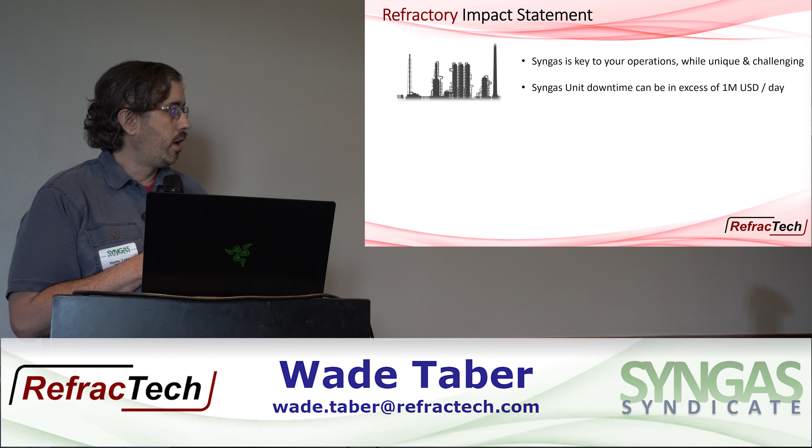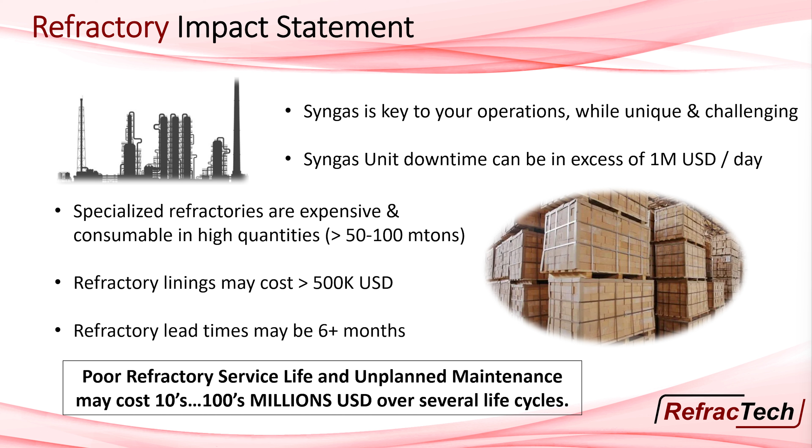But the main issue, already touched on, is the lead times can be quite high. We're talking about very specialized, not commoditized shapes, designed to work in these reactors. So to Fred's point, you've got to have a plan. We're not going to solve an issue just showing up and saying, what's your problem, I can fix it today. Ultimately, even when we get the materials on site, the refractory installation of the unit could be a month, could be 2 months. So that downtime, that unreliability that could be a part of the refractory, makes it one of your highest OpEx, CapEx loss contributors if you don't have this handled right. Over several refractory service lives of linings, you could lose hundreds of millions of dollars of production, if that represents 3, 4, or 5 months of operation over the course of a 10-year period. And certainly some in this room have probably realized some of those numbers.

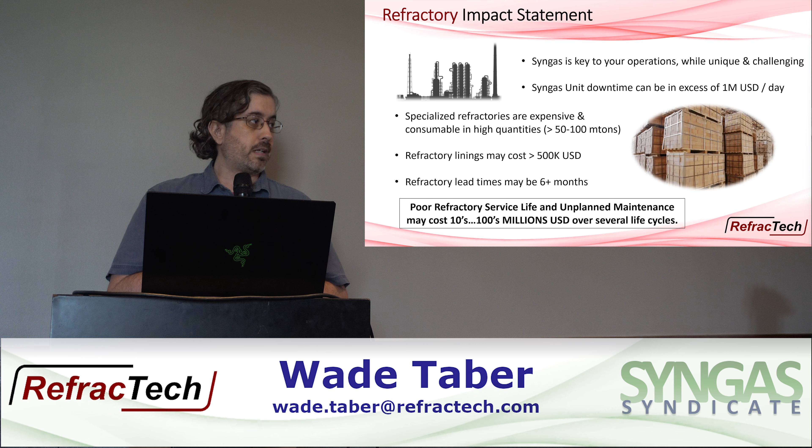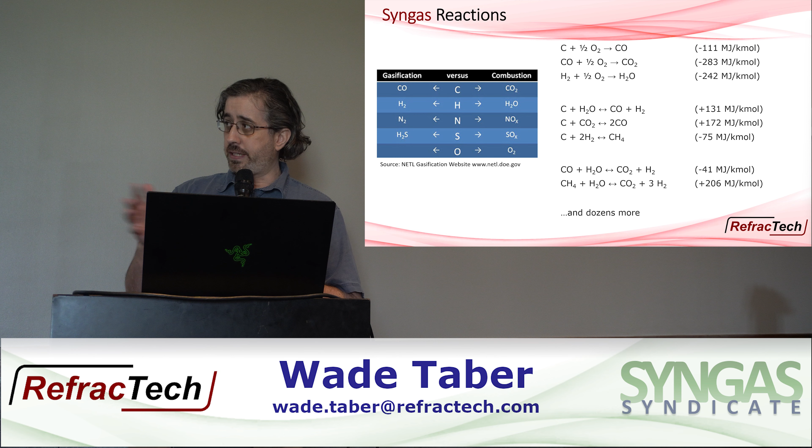But let's talk about what makes this process special. I'm not going to delve into all the reactions, but I want you to realize it's complicated. There's not one or two things going on inside the POX reactor. I'll say POX, but it could be an autothermal reactor or a steam methane reformer. A lot of these reactions are in common, depending on pressures, hydrogen to CO ratios, all these different things. You might pick a different technology, but generally in this room we're all coming from the gasification POX environment. Recognize that the top couple of reactions are your combustion reactions. We put in a stoichiometrically limited amount of oxygen to give you the exothermic heat that drives all the other reforming and shift reactions that produce syngas.

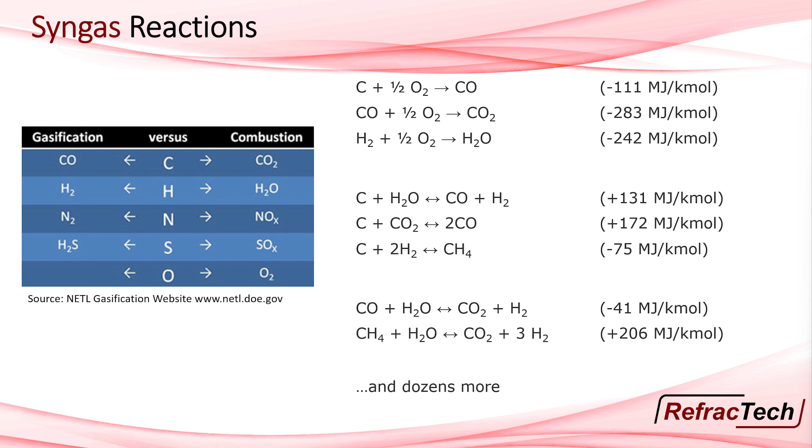What becomes important is realizing these reactions don't just vary linearly down the unit. They're in constant flux. These are all, or most of these are, equilibria reactions. So at different temperatures, different zones where the energy and molecules are present, these reactions are constantly shifting back and forth between CO and CO2, hydrogen and water, steam and methane, and the like. So again, it's not linear, and that's not a good way to think about it. Ultimately, you can think of it as having this oxidation zone coming out of the burner, but that oxygen is consumed - there's no other oxygen coming out with the syngas. And all these other reactions kind of shroud this oxidation zone, depending on how much energy they're getting from the oxidants and whether those various equilibrium reactants are available to produce the products.

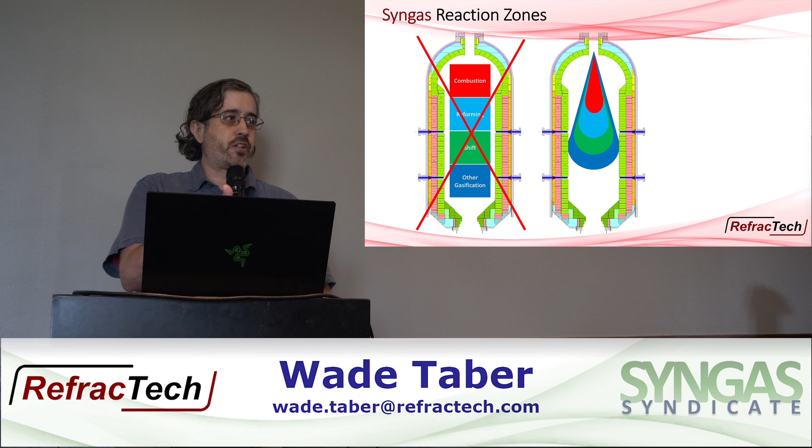What becomes important here is you need to make sure you have a good handle on process volume and flows, because it's very possible that if your flows get out of whack or don't coincide with your process volume very well, you can start to squeeze out physically the space where reactions can occur.

So where your process thermocouples in the middle section of the unit might be measuring 2400 and 2500 degrees Fahrenheit, your oxidation reaction is well above 3000 degrees Fahrenheit, well above the potential to melt every brick you have inside the unit. So if you extend the oxidation too far down into the vessel, like in the cone and throat areas drawn in this quench unit...

That I've seen many times, process thermocouples look normal, but the throat's been melted because there's no room for these other shrouding reactions that take the temperature away to occur. You're oxidizing on the cone, you're oxidizing on the throat, and you start to melt materials.

So there's a lot going on here, and there's a lot more variability inside the space than what one might imagine. And I think that's an important concept to understand.

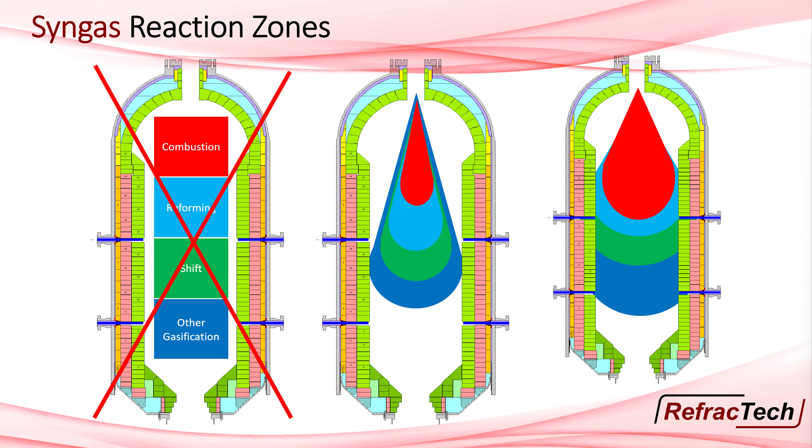When we talk about the various reactions that can be deleterious to the process based on syngas and based on these different thermal differences throughout the elevation and throughout the unit, one thing we have to realize is we can't make the unit too cold. Nozzles, flanges, feed injector nozzles, thermocouple nozzles, anything that gets too cold where the inner vessel wall drops below the dew point temperature of the syngas...

You're going to, just like condensation on your soda can, you're going to produce a liquid film. But that liquid film in the syngas environment, depending on the species that are available to it, could become hydrochloric acid, carbonic acid, ammonium chloride, many other different things that can cause pretty deleterious metal loss to the vessel.

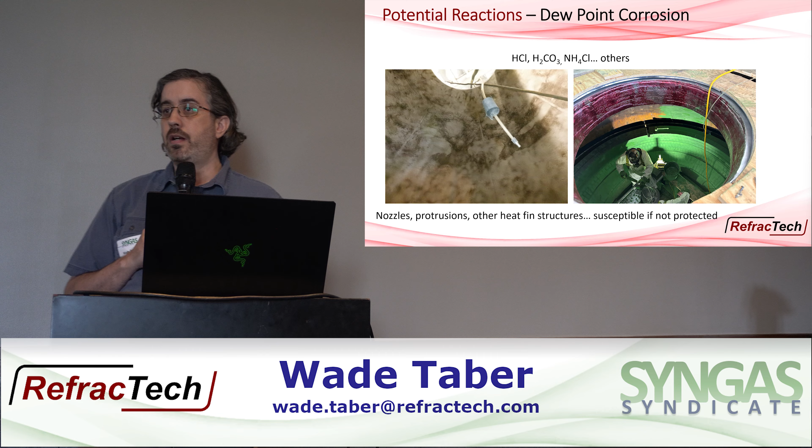So in fact, this is a picture just of this last year at a solids gasifier where their top dome got way too cold. The refractory installer switched out the type of castable that was above the dome.

They said, well, we're going to put in bubble alumina, and it made the dome way, way too cold. And in fact, they lost over an inch of metal up on their top head and had to completely go back in and re-weld and machine back. This process was about 3 months of downtime for them to retrograde the top head of their vessel.

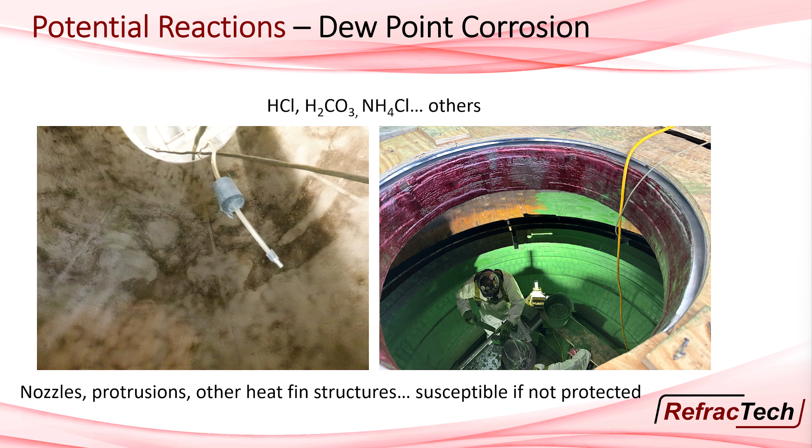So it's an issue that you have to be wary of. You can't be too cold.

Kevin mentioned this. The reason why we use high alumina refractories is because hydrogen, dry hydrogen specifically, is very capable of reducing silica, which is a very common material, not necessarily impurity. The high aluminas, it could be an impurity, but it's a very common material inside refractory materials. So your insulating bricks, your super duty bricks that are used in the outer segments of the lining, those tend to be safe because they're at lower temperature and below the reaction zone.

What we would do to evaluate is we'd pull up like an Ellingham diagram, and you look at the temperature that you care about that refractory sits in, and you look at the particular oxide that you're concerned about hydrogen reducing, and then you have to look at the partial pressure of the hydrogen. And that's what dictates whether or not the hydrogen will reduce that compound.

Incidentally, the way the Ellingham diagram works is you're looking at a ratio between the partial pressure of hydrogen versus the partial pressure of water. Again, dry hydrogen reduces much more effectively.

So what we end up setting ourselves up with is something like a solids unit that has slurry and a lot of water going in with the feedstock tends to have a higher partial pressure of water than some of the natural gas POX units. So they actually don't have to worry so much about the hydrogen reduction, but they have to worry more about the dew point corrosion because their partial pressure of water drives the dew point temperature that I previously talked about.

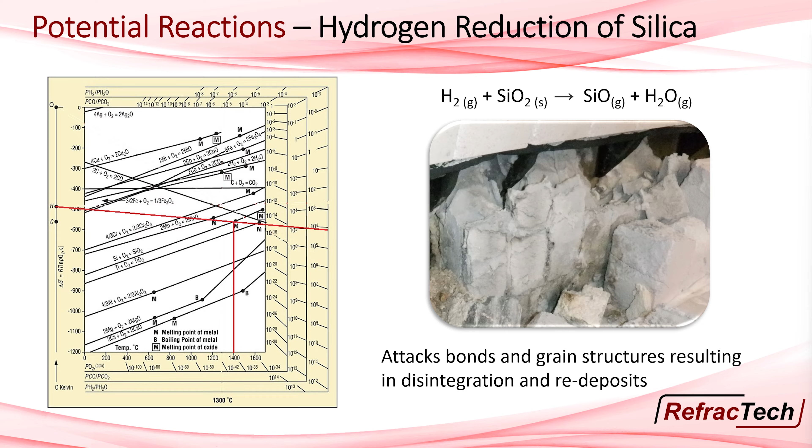So this is the intermediate layer of a unit, and these bricks just fall apart. Looks like little mountains of snow, right? The bricks just crumble when you touch them. And as Kevin pointed out, this material, the silica that was carried off, it goes somewhere, right?

It becomes gaseous silicon oxide. When this cools in your waste heat boiler, it flakes out and starts to form deposits and solids, and it starts to clog up your tubes. It becomes a big issue. It's not only deleterious in the refractory, but it clogs up your downstream components.

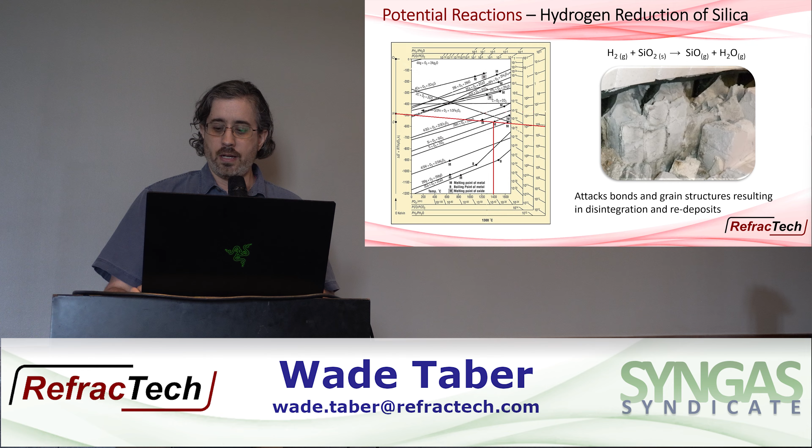Tim mentioned the Boudouard reaction. Boudouard is the decomposition or equilibrium of CO and CO2 that occurs inside the POX unit. It was actually on one of my first slides where I showed you all the POX reactions. You actually count on this in reverse to reform the CO2 into CO. The problem is when your CO partial pressure becomes high enough in a temperature band of about 500 to 1,000 degrees C, catalyzed by iron impurities in the refractory, we can actually start to convert the CO back to CO2. And because most of your POX units still have anywhere from 5 to 10% CO2, when the CO2 is formed, it forms with it another molecule of carbon.

This 500 to 1,000 degree temperature band I'm talking about is not on the hot face, it's not in the process volume, it's in the backup lining of your refractory. And so this carbon deposits in the porosity of the refractory.

Materials that have high iron contamination, which castables tend to have more of, just get completely torn apart. So here's a couple of pictures of the castable layers inside the refractory, right? There's a hot face here that's completely untouched, but inside the depth of the refractory, here's a castable body that's just completely carbon-filled. That was snow white dense refractory before it was put in. After a couple of years, I can dig it out with my hand quite easily. This is the Boudouard carbon swelling. The carbon is known to swell that refractory about 20%, and since the ceramic is inflexible, when you swell it 20%, it falls apart.

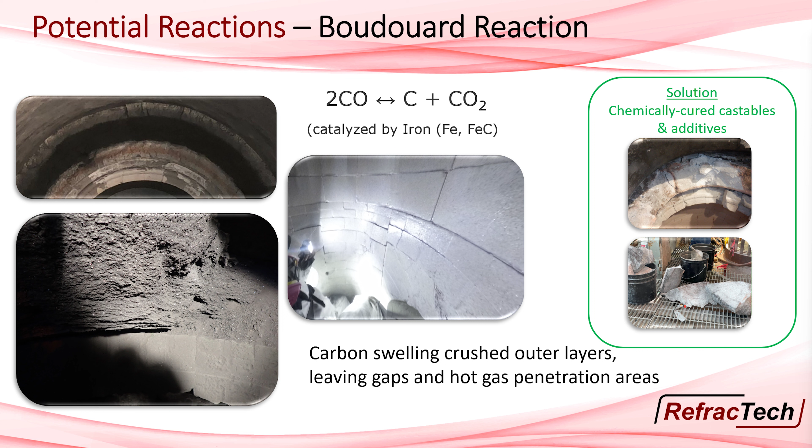So in many of your units, as we've worked on retrofits, we've moved to chemically cured castables. I'm happy to say - maybe it's premature - but I'm working with Saint-Gobain now on chemically cured castables, because they offer the capability of using some of their bubble alumina and other mixes to move to a chemically cured species, so we don't have to sacrifice things like thermal conductivity to get this benefit of getting rid of the Boudouard carbon.

So understand, if it's not clear - many of you know, in a POX unit with natural gas, you're not wearing away brick, right? We're not thinning out the brick over time. That's not the end of the service life for you guys. What it is, is the up and down thermal cycles where the joints become misaligned, and we'll talk about that. But it's also the formation of this Boudouard that crushes up the outer materials and forms gaps. And when you start to have too many hot spots because you got too much carbon in that unit, or too many aligned gaps, that's your end of service life. So these are the things we have to address in most of the units represented in this room.

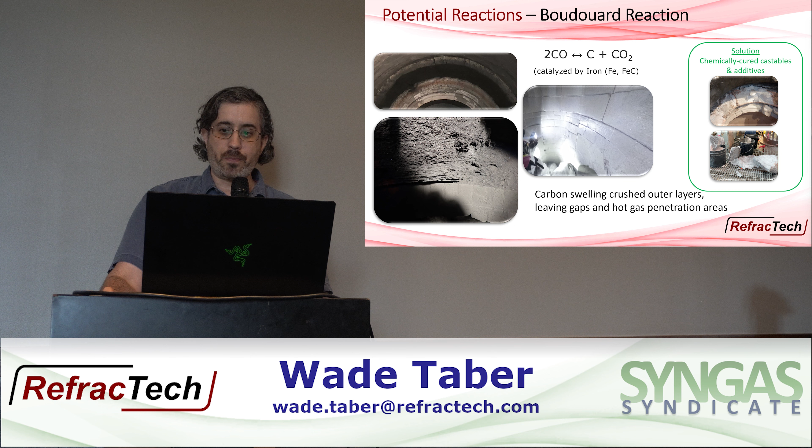So I kind of indicated - the heat transfer calculations are important, right? We can't be too cold, we get dew point. We can't be too hot, we damage the refractory. And all the differences in between.

So we have to understand that with the designs of these units, the things mentioned before - the hydrogen content, the molar volume percentage, the partial pressure - it influences the thermal conductivity. In some cases it can double the thermal conductivity of a highly porous material. We have to understand that. We have to be analyzing the heat transfer of these reactors with the fiber properly compressed in its use state, not in its installation state. That could throw us off by 100 degrees or more.

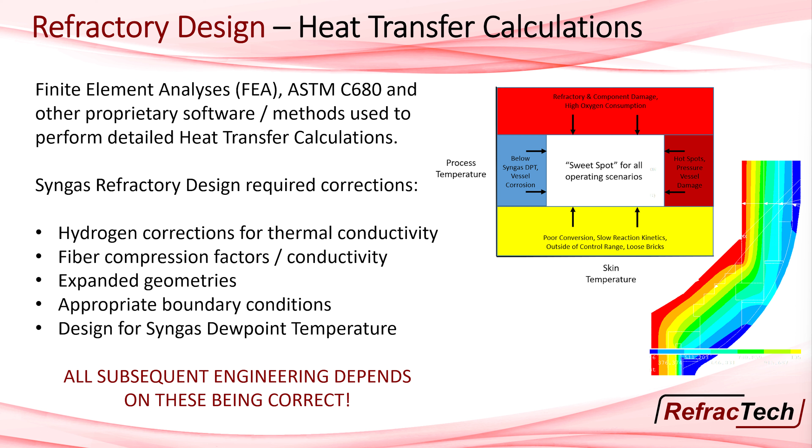We have to have the appropriate boundary conditions. This comes back to the issues of temperature measurement and how precise those can be, where the thermocouples are located, and where those reaction zones are located. So we use things like FEA and time-proven methods to correct the material properties for complicated geometries to get these areas correct.

Everything beyond this point, getting the thermal expansion correct, getting the movement around other components, all these things is about getting the temperature estimations of the various layers correct. Just like I mentioned in A&A's pitch, where the temperature of the lances of the feed injector affects concentricity and retraction, we have the same issues here with refractory, to make sure something's not pressing on something else.

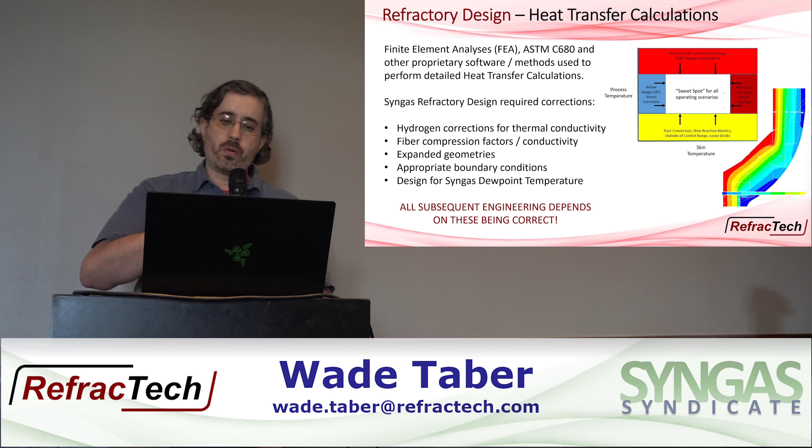One immovable body breaks another immovable body, gives you a gap, gives you a hot spot, shuts you down, forces an outage. So radial thermal expansion is something that's important to talk about because you have multiple ring segments, usually refractory shapes, that form the bases of these cylindrical vessels you're putting the refractories inside of.

There's a couple of schools of thought in terms of how one should handle radial expansion. This is the first. Many European design houses have taken to do this based on other applications. This, by the way, is perfectly valid in some applications. I'm going to tell you why it's not valid here, as a preview. But in some applications, it's perfectly valid.

What they taught in some of the units you have operating at your facilities is that every few bricks, we're just going to make an open joint. We're not going to mortar them together. In fact, they have this scheme of putting oil paper just over that joint so the bricks can slide, which I don't understand, because ultimately the entire length of chord of the bricks grows, not just the last little end of it. So I don't understand putting the slick stuff just underneath the opening, but they put these periodic joints.

First, understand that when we design the thermal expansion of the refractory layer, we're designing to design conditions. So for most of your units, we're going to design that for 2,800 degrees Fahrenheit, because we don't want the thermal expansion to fail and your bricks to break if you had an excursion beyond that point, up to some point for some period of time.

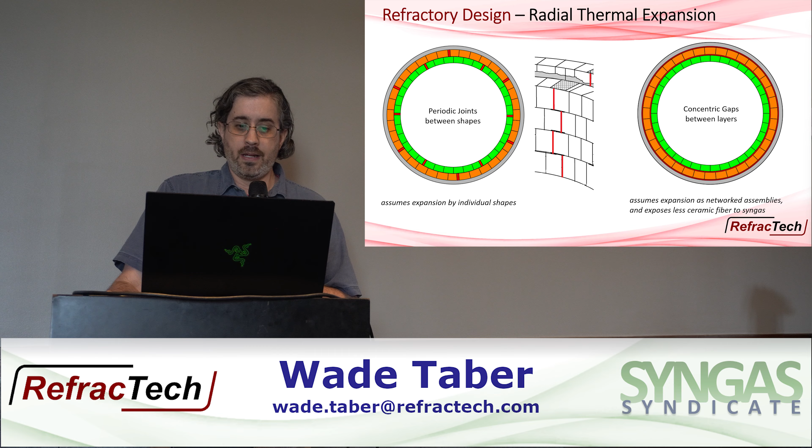But just to put a real world spin on this, to highlight the point, the method on the left assumes that individual shapes are expanding, they can close gaps. The method on the right really relies on the fact that the wall, the hot face, works as a big networked cylinder, a big networked assembly.

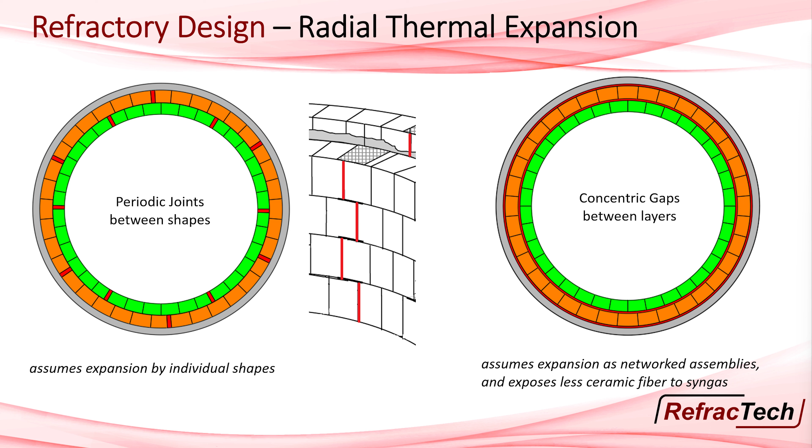We're not getting individual movement substantially between bricks. In fact, when you view any given hot face lining after use, you'll see 3 or 4 radial cracks go down the wall of a given gasifier. You know it's a networked assembly, not individual bricks, because some openings might follow a joint, but others just cut right down through a brick. This thing doesn't care if it's an individual brick.

It's just a solid wall of refractory that's expanding and contracting. We also know that if you wanted those pieces to slide together, like the European radial expansion design, you could actually get such high coefficients of friction that the force needed to slide bricks in the lower wall together, with all the bricks stacked on top, would exceed their crushing strength. So before you'd close that joint, you'd break the brick and crush it, which is what we see in some places that use this concept.

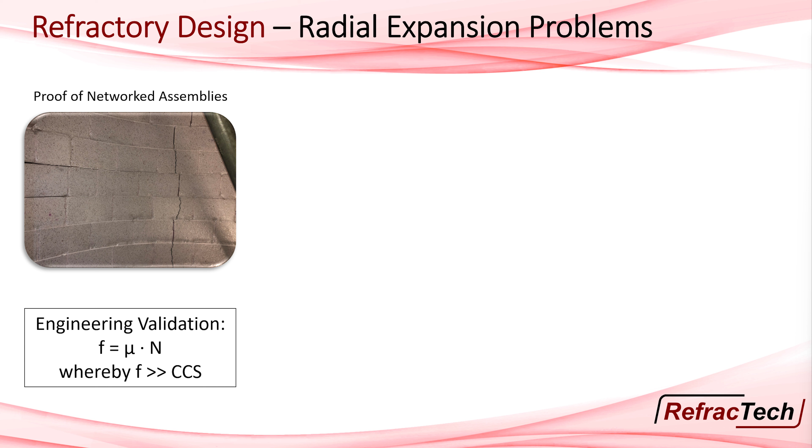Not only that, but when the joints remain open, you're not actually addressing the need for radial expansion. So this same lining where we saw all the open radial joints, we started to take down the hot face, and the brick layer right behind it was all crushed to hell. In fact, the top of the sidewall of this unit was coming in, and the broken bricks started falling into the gaps between the hot face and the second layer, which didn't let the hot face layer move back. It just became an ever-driving scenario where the wall started to collapse.

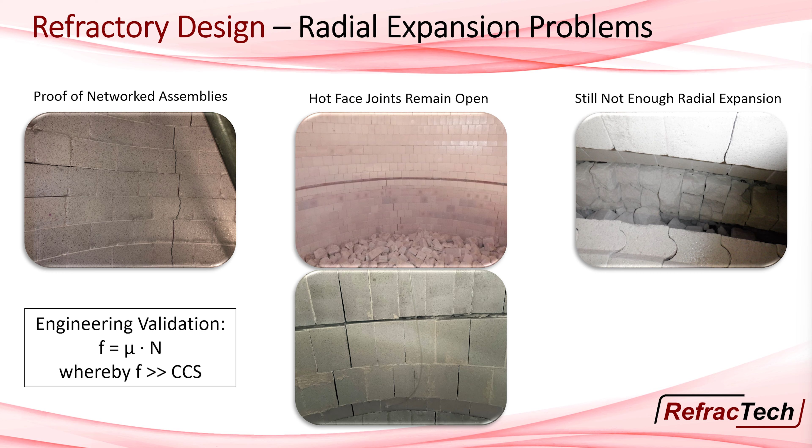Similar issue, right? Again, the inner layer expands more than the outer layer. Ideally, you'd hope the inner layer pushes on the outer layer, and all the little bricks individually kind of open up, but not too much, not letting the hot gas pass through. But again, these are networked assemblies, not individual bricks.

More typically what happens is, worst case scenario, the hot face might expand and take all of its opening in one joint. Realistically, it might be distributed over 3 or 4 joints, but you're popping open the outer ring segments when the hot face expands. If the hot gases find a way past the hot face and align with these joints, you have a hot spot. Now you're shutting down and relining what could otherwise be perfectly good brick, just out of alignment.

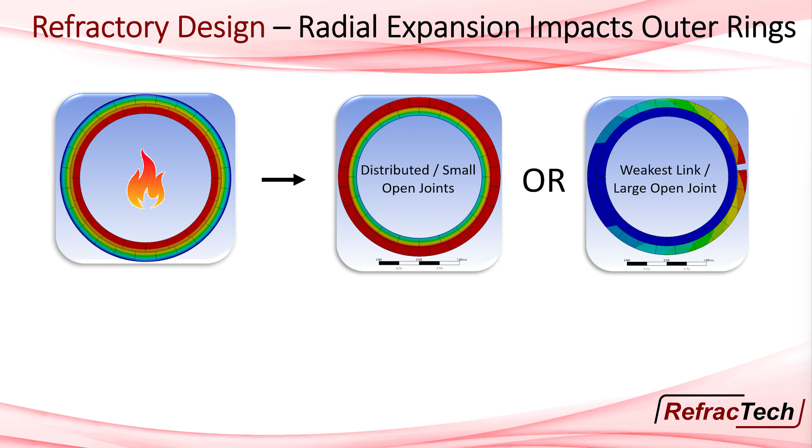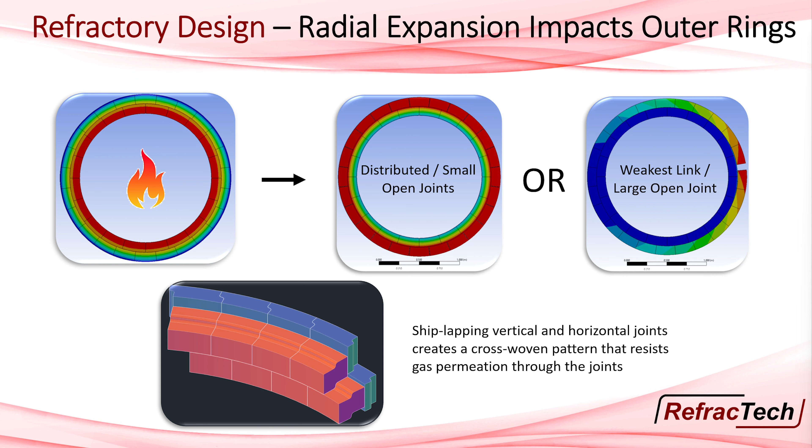Some ways to dissuade this are using shiplap joints. In the worst cases, in some applications, we can actually shiplap both the vertical joints as well as the horizontal joints. So, like pictured here, I have a hot face and a second layer that are shiplapped in 2 directions, giving this cross-woven pattern. No matter how this thing expands or contracts, unless any one joint expands or contracts more than an inch, I still have a tortuous joint for hot gas to go through.

In many of the revisions we've done over the last couple of years, a lot of your units now have the second layer as a shiplap, so the hot face doesn't push open the outer layer bricks. Incidentally, they're larger shapes also, so you have fewer joints, less opportunity for this to happen.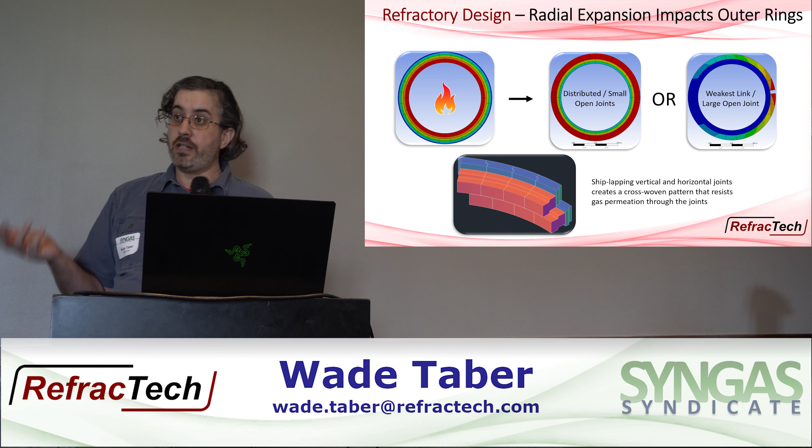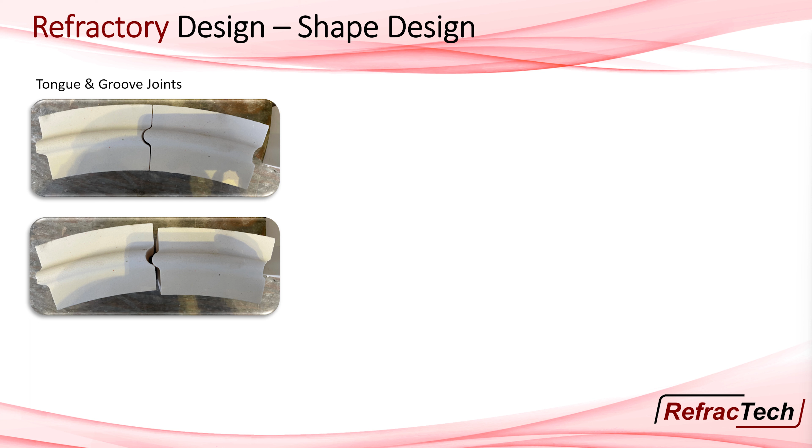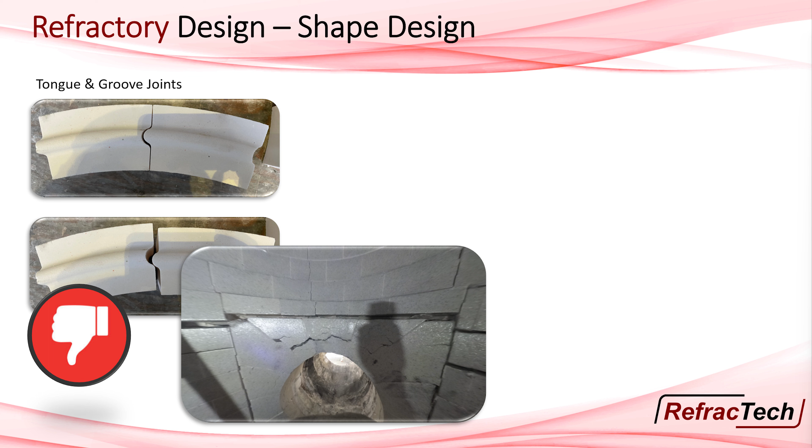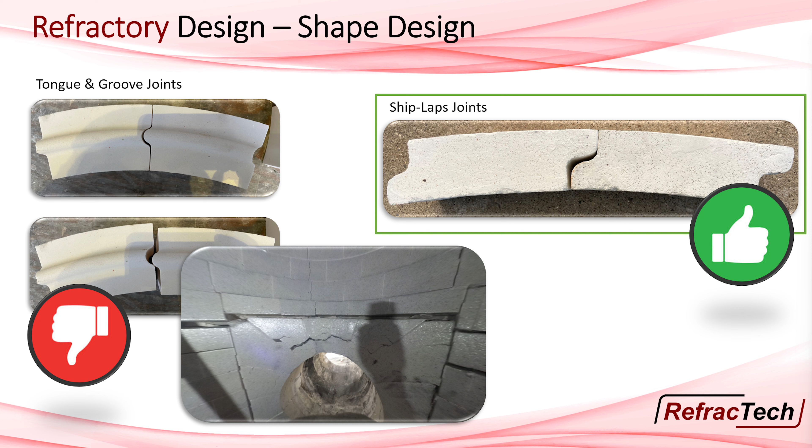John talked about tongue and groove. Tongue and groove has its place, but I'm not a fan of it, because while it helps during installation, here's what physically happens: if you get too much expansion in one area - and in some units you might be expanding from the bottom of a POX train all the way to the top, a couple of inches - things in the center throat section, the choke section, might actually separate. And if they separate and, as they cool, become misaligned, you can get gaps that the tongue and groove doesn't allow to close back up. So I find shiplap is much more robust in terms of allowing itself to close back up when you have separations, which is why we've instituted it successfully in many of our designs.

This goes specifically to Tim's flexible thermocouple and Lionel's question. Something that works quite well with Tim's thermocouple probe design is the concept of nesting the thermocouple blocks. So instead of the thermocouple penetration areas inside your sidewalls just being one more concentric layer with a gap between layers, we produce a nesting offset in the back of each block that sits inside the next block, and the gaps around it accommodate the expansion between layers. What's nice about this is it gives you a more tortuous, shiplap-like design between these blocks where gas could be working through linings and layers, but it also, from a top-down perspective, locks your bricks in so they don't come out of alignment through many thermal cycles. So your alignment issues are much better when you lock these bricks in.

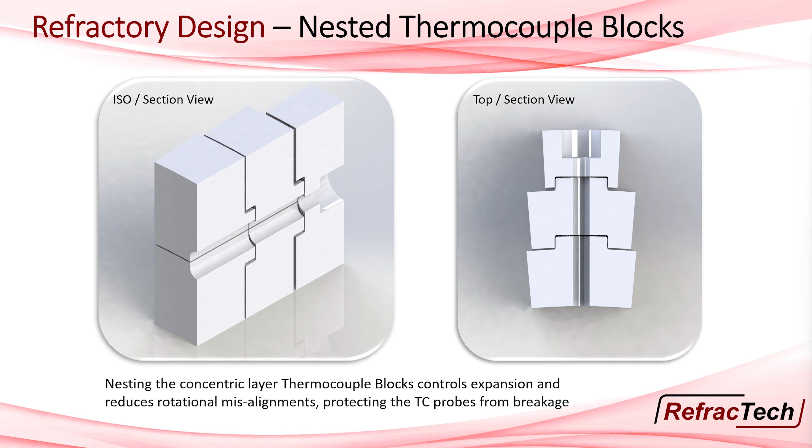This is a big one, guys. Everybody wants to go do a partial repair - I understand, we might do a dome, we might do a cone, various sections, right? That's par for the course in terms of what we're doing today. But what you have to recognize is you're given an initial refractory design with initial thermal expansion joints throughout the different layers, because these layers are for the first time going to go from cold to hot and have to all move around together.

But what happens if we're going to just put a cone inside of the existing sidewall? That sidewall, all those layers have already moved outwards - they got hot. As we saw, sidewalls develop cracks because of the radial expansion, and these sidewalls don't completely move back in when they get cold. The vessel might drive a few millimeters of movement back in, but it has to compress the fiber and compel all these layers to move uniformly. Realistically, when we measure any given POX unit, the diameter is a half inch, quarter inch larger than what it started out as. It's not because you lost a half inch of brick - it's because it thermally expanded and stayed there.

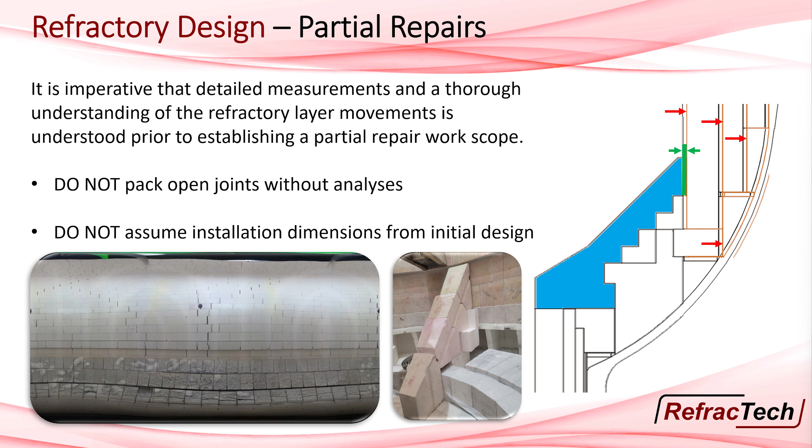Now when you go to install the cone, with the tight tolerances Saint-Gobain gave you for all the different shapes, the installer left unchecked is going to say, well, I want this cone to fit tightly inside the sidewall because that's my job. They've done you a complete disservice. If you install that cone tightly inside the sidewall and don't allow for an additional expansion gap - because that cone has to initially grow, whereas the sidewalls already have - your cone starts to peel itself apart. The old Texaco refractory supervisor, Ken Young, called it the blooming onion effect. What causes these cones to just peel apart and make all these radial hoop joints and hoop stresses? It's not allowing enough radial expansion between that and the wall.

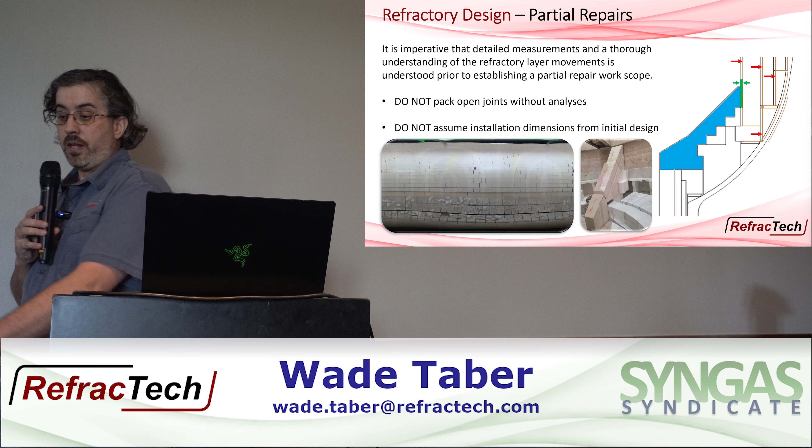We see this in other areas as well - around the transition blocks, up around the domes. You have to be cognizant of what you're leaving in place and how much it's moved, and then what you're putting in and how much that has to move. Ultimately, you have to have a refractory engineer go back and run the calculations to say, this has moved this much, this is going to move this much, therefore this is the new gap.

No better practice - I was just at Duke Energy a few months ago. I was there two years ago, and I said, hey, when you guys put that sidewall back in, recognize the outer sidewalls have moved. And they said, okay, what should we do? I said, well, you should put a little bit of a gap between the back of the hot face and the outer two layers of sidewall that you're keeping in. We actually calculated it - it was a substantial gap, 5/8 of an inch.

And they said, oh, we don't like this. 5/8 of an inch, that's a big gap. We don't want hot gas flow. I said, trust me, here's the calculations. 5/8 is conservative. It actually moves about 3/4 of a unit that size.

They put in a 5/8 inch gap in the lower sidewall. The next time they came in, they only lost a 1/2 inch of brick thickness over 1.5 years of operation, which is incredible for a slagging gasifier. They're going to get almost 6-year refractory life in a slagging gasifier, which is double almost what anybody's gotten.

Incidentally, in the same sidewall area, after I left, the installer in the upper sidewall said, yeah, but the upper sidewall has to be tight. Let's get rid of that 5/8 inch gap and brick it tight. They bricked it tight. You can see right here where that started. They lost about 1.5 inches of extra brick where that was bricked tightly versus where they left the appropriate expansion gap. And incidentally, all the outer layer bricks they exposed were all crushed as well.

So something has to give, right? You're building up stress in the lining system. In this case, you popped all the slag penetrated areas of the bricks off and lost substantial brick thickness. But in some cases, you just crush the outer layer, which becomes a proposition for a reline.

Again, this is germane to you guys with POX units, not solids units. When you start crushing up that outer IFB layer, you're going to reline. You're going to get hot spots. We're going to pull out perfectly good hot face brick, full 4, 5, 6 inches thick. But we're going to reline it because you've crushed your outer layer, because you installed your hot face too tightly.

So a couple of tools we've developed. I have examples on my back table. I'd be happy to run through these.

We have a radar scanning technique now, based very similar to ground penetrating radar, where we can actually scan the refractory lining hot face. We can see the layers kind of depth-wise going in, so we can understand if you have voids or defects inside those layers.

We can understand how much expansion you might still have from the fiber layer. So this is the hot face layer, and a small gap that developed when it cooled between the hot face layer and the second layer. This light line here represents the bubble layer and the IFB, and this represents the big fiber layer between the vessel wall, which is here, and then you get just noise in the scan.

And this can actually scan 4 feet of refractory. We're really scanning 1.5 feet.

So we can start to see, without taking down hot faces, to look for hot gaps and look for spaces, right? Because often forensically, that's what we end up doing. Somebody says, I have a hot spot, it must be hot gas. It's not apparent on the inside, go find it. You start taking out all these good bricks with the hopes of finding a void. Now we can look for voids without taking those bricks out.

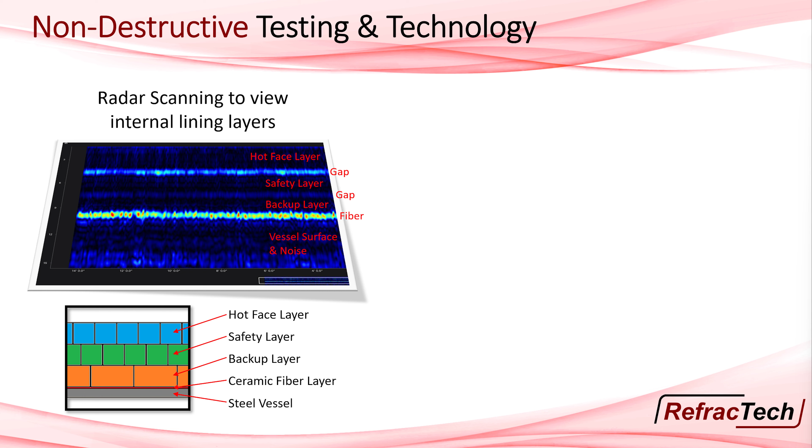I use this technique. So if you have a quench upset, or if you have a tube inlet leak where you get water inside the unit, the way these radar waves work is they use the dielectric properties of the material to look at how fast the radio waves travel through the material, to give you a reflection of different dielectric surfaces and give you these depth maps.

It happens the dielectric constant of that material changes pretty substantially if you introduce something like water in the porosity. So since Lionel had an issue where he got some water in the bottom of his ash pot, he drained all of it out, let it set for a couple of days. So on the inside, it looks nice and dry and good, but we don't know how much water got into the backup layer, because we could have still thousands of gallons of water in the backup layer that we better figure out, because if we heat up and that turns to steam, they're going to blow out the refractory.

So I brought the tool in, we scanned the wall, and we were able to figure out what depth the water traveled in the backup layer, and we were able to suggest a curing schedule and a maintenance schedule that addressed that quite successfully.

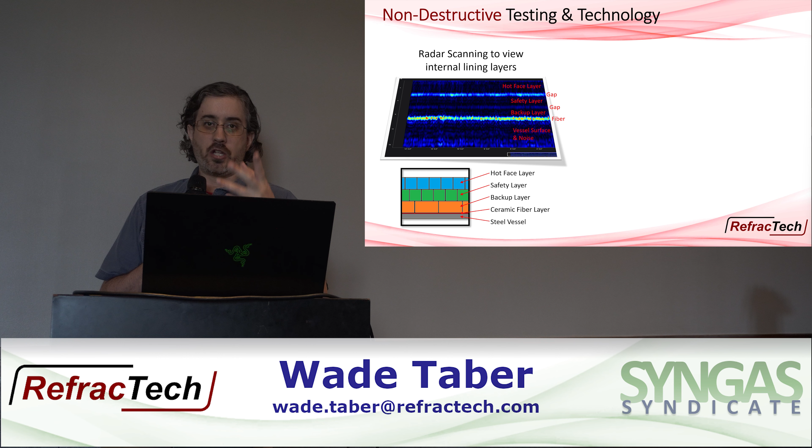Another tool used across industries these days is we digitally scan. I have my digital scanner here.

I can scan any one of you and make a little 3D model you can put on your desk. But I use it to scan complicated and refractory linings, comparing the point cloud from one instance to another to see in a nuanced way how different materials are moving with respect to one another, or with respect to a slagging gasifier where you're losing thickness, getting a detailed map of the thickness loss.

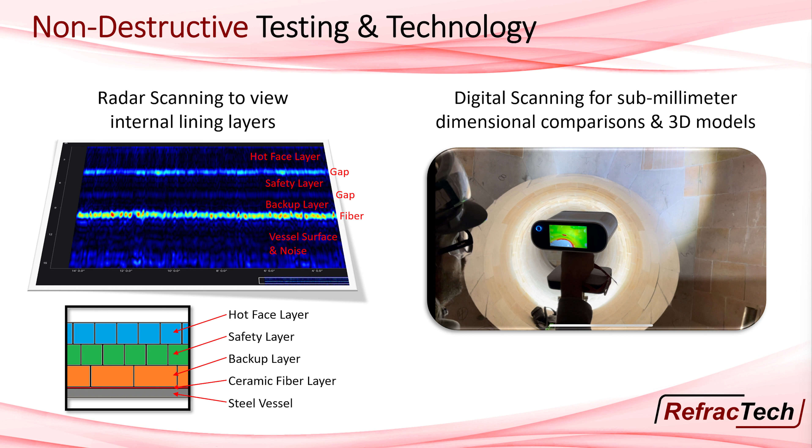Like Tim's IR cameras, on a pixel by pixel basis throughout the unit, as opposed to going in, dropping down in a bosun's chair, taking differential measurements, and trying to come up with an operating or maintenance philosophy based on that.

This is all about giving data to you guys, benchmarking what it was last time versus this time, because you shouldn't be beholden to any one person telling you they know 100% what you should do. I have a pretty good track record, but I want to give you data, share what I'm looking at, and make these maintenance decisions together.

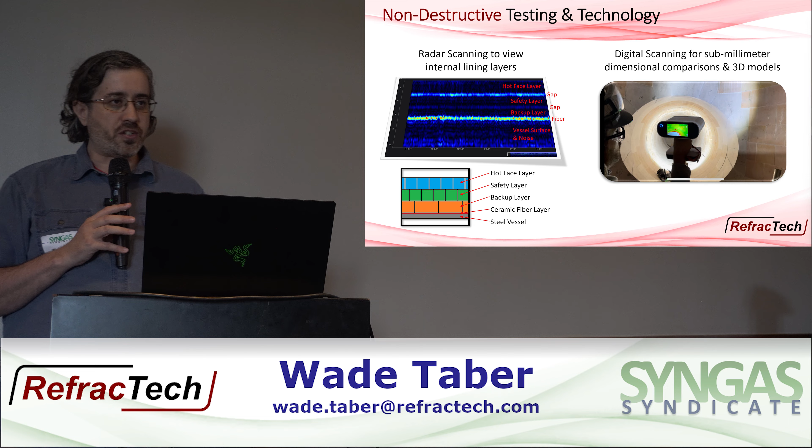My reference list is quite old, probably twice as long now. I feel I mitigate refractory risk in a number of ways. I tend to be involved in the upfront design, doing design reviews, sharing the data and calculations with you. Then I get involved with the manufacturers, agnostic of who it is—I like to work with Saint-Gobain but can work with anybody—making sure they're supplying to the specifications of the design.

This is something more of you should consider. Some of you already do, but when you're purchasing a million dollars of refractory, take a plane ride and go look at the stuff and see how it's going to fit. You know the delays and problems it causes if you find out it doesn't fit when you're in the middle of your outage. So take the time.

That same scanner tool I showed you, I take with me. I scan the shapes and compare them right to the CAD model. It immediately glows green if it's within the 1 millimeter tolerance, versus telling me these shapes aren't going to fit together as expected—we'd better remake or mitigate these shapes.

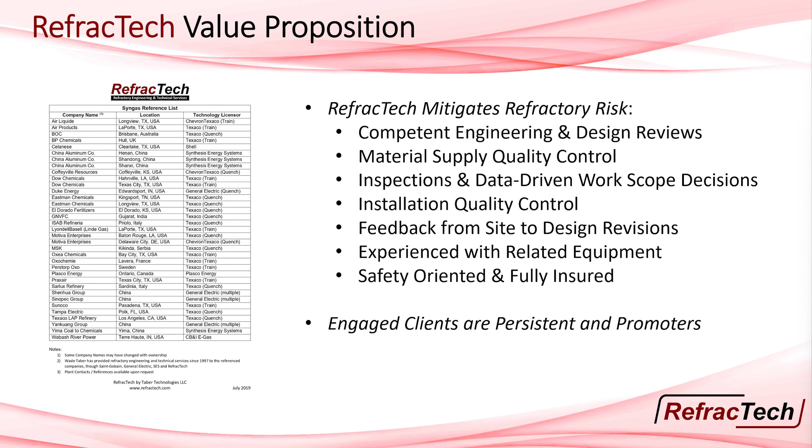Everybody I've engaged so far has remained persistent and a promoter. And frankly, I have to be careful on how many more people I engage, otherwise I can't give good service to the people I am hopefully providing good service to.

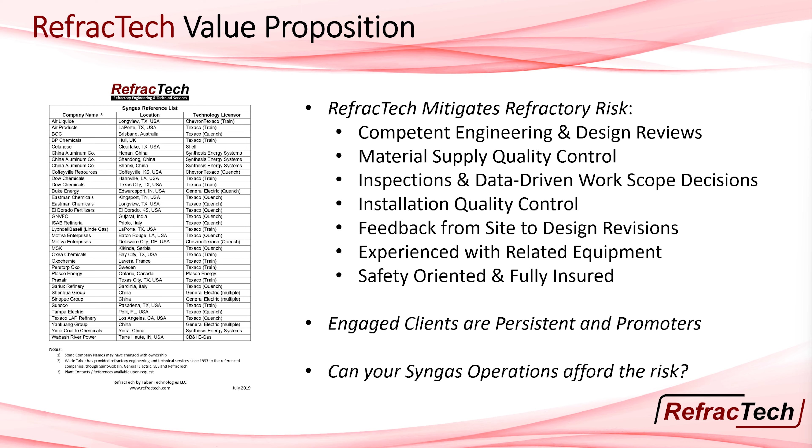And it's the same question I posed to you last time: ultimately, can you afford not to do some of these things? Yeah, we can save 50 grand, 100 grand by not having Wade sit there for some period of time, for some number of months. But what's going to happen if you used all your refractory, did something wrong, and now you're shut down for 6 months?

A pretty cheap insurance policy. It's my last slide, an example of a synergy that I could see us working on here in our little Syngas group.

So problem statement: feed injectors. We've got, as Andy said, concentric gaps. We have retractions, little minor changes. So obviously all these gaps we're talking about are the cross-sectional areas that divide into the gas flow that set your velocity for the process volume.

We have certain velocity limits that we think we know pretty well. Sometimes we don't know so well, we're still experimenting with. But when you talk about things like non-uniform or concentric annular gaps, turn down injector designs, things like that, let's start to use our head on some of these things.

Understand that if you have a concentric gap between two tips, which is always measured by some fraction of millimeters, we're not talking huge concentric gaps. In some cases in the smaller injectors it's a quarter inch, 3/8 of an inch.

So if you're shifted by 1 or 2 millimeters—sorry for switching units—if you're shifted by a 1/16 of an inch one side to another, take away a 1/16 on this side, give it a 1/16 to the other side, well, the cross-sectional area changes by the square of the radius. So you could literally induce twice the flow on one side of the injector than the other side, just by a couple of millimeter changes in concentricity.

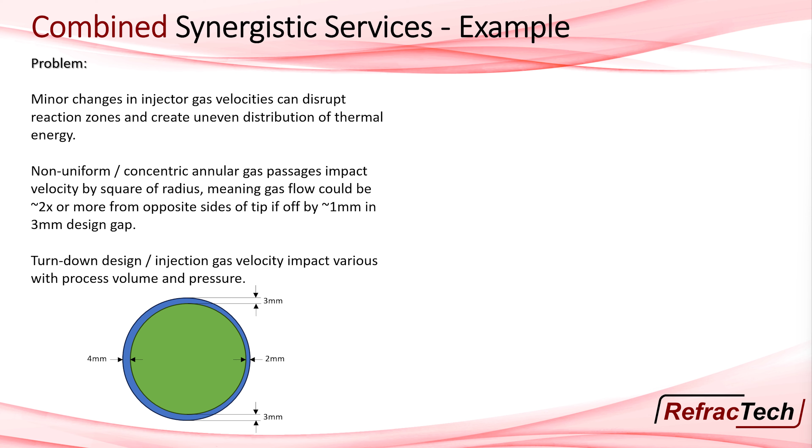And again, these guys do an impeccable job, A&A, of making sure that out of the box, it's where it needs to be. Who's to say it's where you think it is after multiple thermal cycles, operations? Who's to say it's where you think it is based on what you think the temperatures of your injector are?

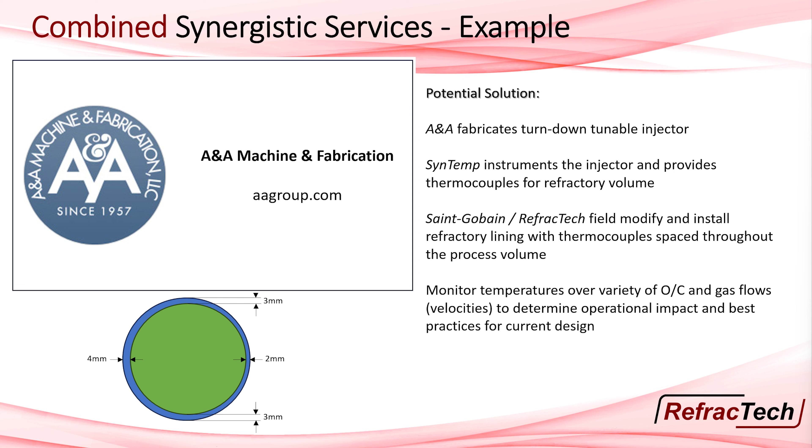So one of the things we can imagine doing is, okay, I'm going to engage A&A, and we're going to do some things with an injector. There's actually some things where we can make it tunable. Maybe this isn't the injector you run as a production injector. We could certainly make some different gasket thicknesses and iterate what our expansion gaps, our annular gaps, are going to be. I'm going to get with Tim.

Tim's going to instrument that injector. It's also going to give me a bunch of thermocouple wire. And when I install the next refractory lining, I'm going to run some thermocouple wire behind the brick, poke it out in different areas of the hot face, very minuscule pinpoints. Now instead of the 1 or 2 elevations in the reactor where I get process feedback, I'm going to get 10 or 20.

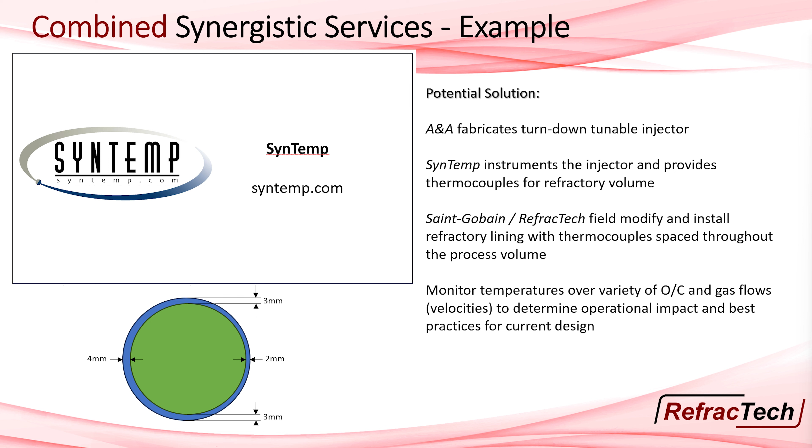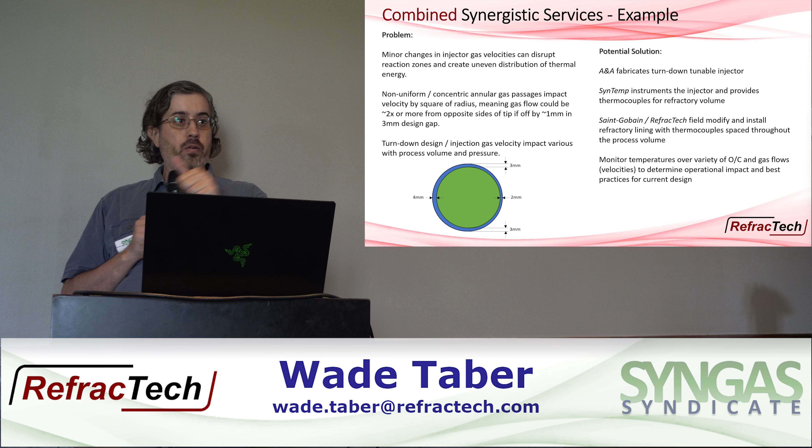Now when I start to look at velocity flows and turn down and all these different things you guys want to do with the injector, I can start to develop a temperature map inside the unit to say, hey, for your process volume, for your configuration, this is how much you can safely turn down, turn up, turn sideways, whatever. You don't want to be causing damage by just applying general rules of thumb that we think apply to every single injector configuration and gasifier.

So we'd monitor the temperatures. These thermocouples would be essentially sacrificial, they might run for a month or so. We'd get a hell of a lot of process data, wouldn't we? We'd learn all kinds of things we don't know today about your reactor.

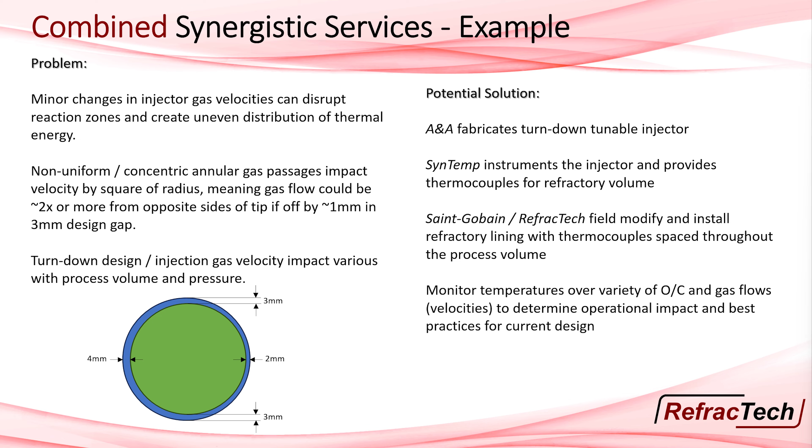Just an example. Appreciate your time. Is there any questions that I can handle right now? I substantially answered everything. Awesome.